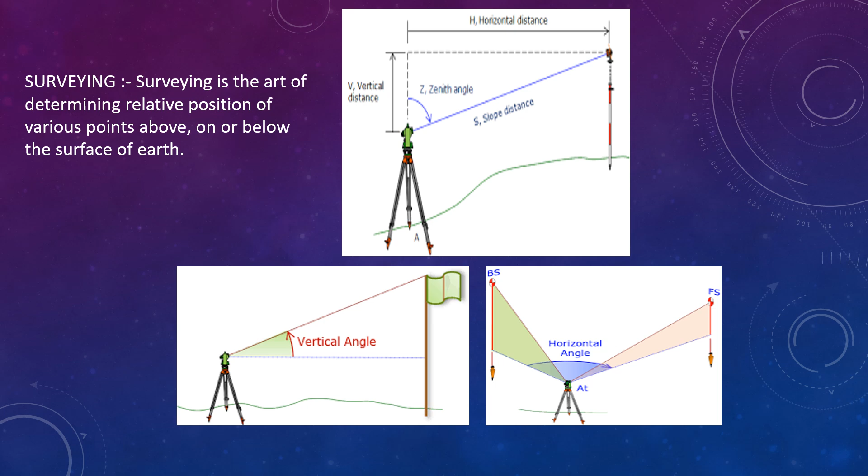Earth has an oblate spheroid shape, meaning an oval shape. Earth has two axes: the equatorial axis and the polar axis. The equatorial axis is the horizontal axis and the polar axis is the vertical axis.

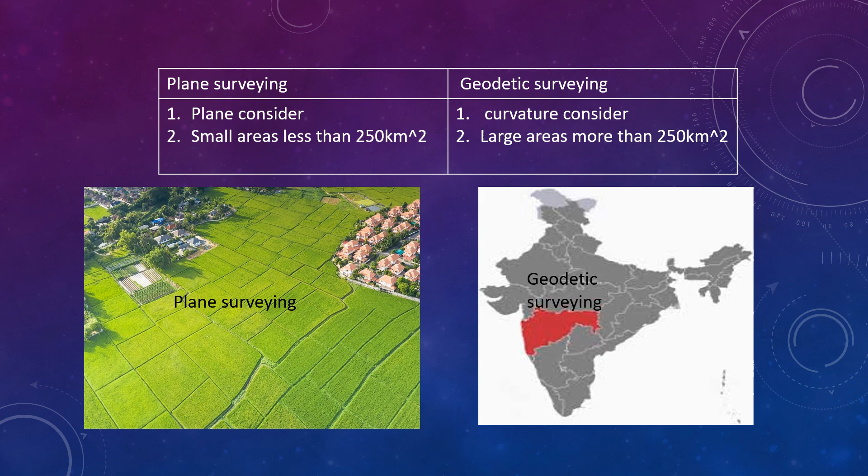Of surveying and the functional classification. So first...

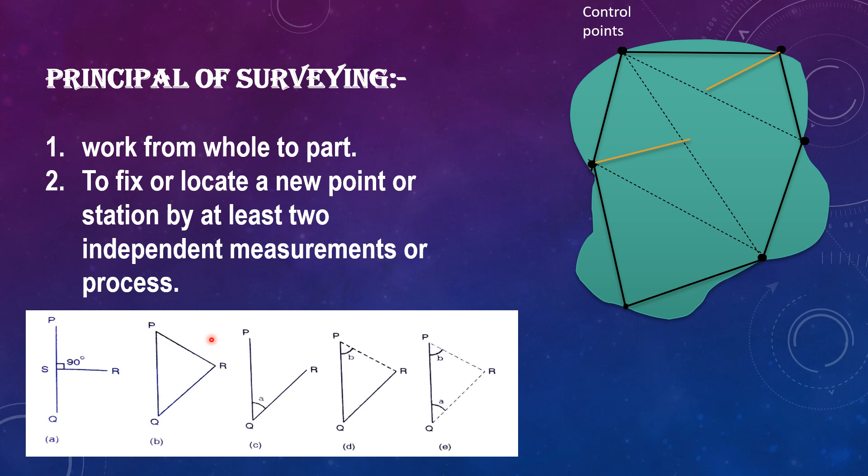Functional classification. The classification of surveying is done on the basis of function. So first is the control survey. In control surveying, we are establishing horizontal and vertical positions on widely spaced control points, मतलब जो widely spaced control points है उसकी मदद से हम horizontal और vertical positions find out कर सकते हैं under the control surveying।

Then second is land surveying. Land surveying is also called as cadastral surveying. This type of surveying is used to determine the boundaries and the area of land. Then third is city survey. City survey is used to carry out the layout of streets, pipes and buildings.

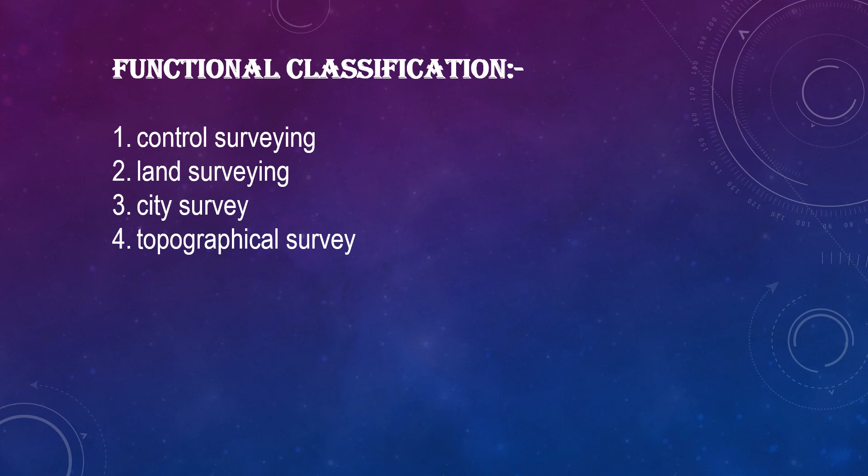Then fourth is the topographical surveying. This topographical surveying is basically carried out to find out the natural features of earth. Then next is hydrographic surveying. This hydrographic surveying is used to establish water flow in case of rivers, and also used to find out the areas which is below the water surface.

Then next is engineering survey. This survey is carried out to plan and design the engineering works. Engineering works means buildings, streets, bridges, dams, reservoirs. For all these type of structures, for planning and designing of these type of structures, engineering survey is carried out. Then next is astronomic survey.

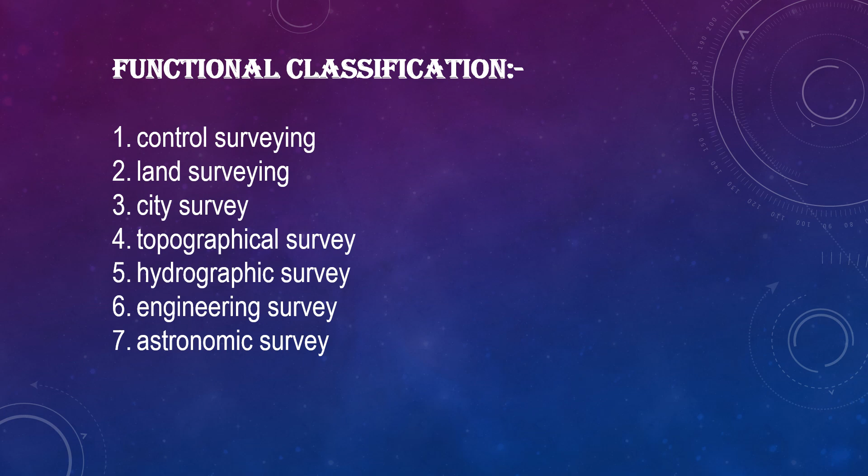स्केल ऑफ मैप इज अ रेशियो ऑफ मैप डिस्टेंस टू ग्राउंड डिस्टेंस। अब ये जो स्केल ऑफ मैप है वो हम हर किसी प्लान को या फिर हर किसी मैप को ड्रॉ करने के लिए यूज करते हैं। ठीक है, मतलब जो कोई भी ग्राउंड का डिस्टेंस है उस ग्राउंड के डिस्टेंस को हम एज इट इज मैप पे नहीं कर सकते या फिर मैप पे प्लॉट नहीं कर सकते। उसके लिए हमें उसकी रिड्यूस्ड स्केल करनी पड़ेगी, मतलब उस स्केल से हम कम स्केल मैप पे ड्रॉ करेंगे। ठीक है, तो वो हम 3 तरीके से स्केल ऑफ मैप बना सकते हैं।

तो उसमें से पहला है लार्ज स्केल। लार्ज स्केल इज 1 सेंटीमीटर इज लेस देन और इक्वल टू 10 मीटर। यहाँ पे एग्जाम्पल के लिए हमने 10 मीटर 100 मीटर लिया है, ठीक है, डिस्टेंस चेंज भी हो सकते हैं।

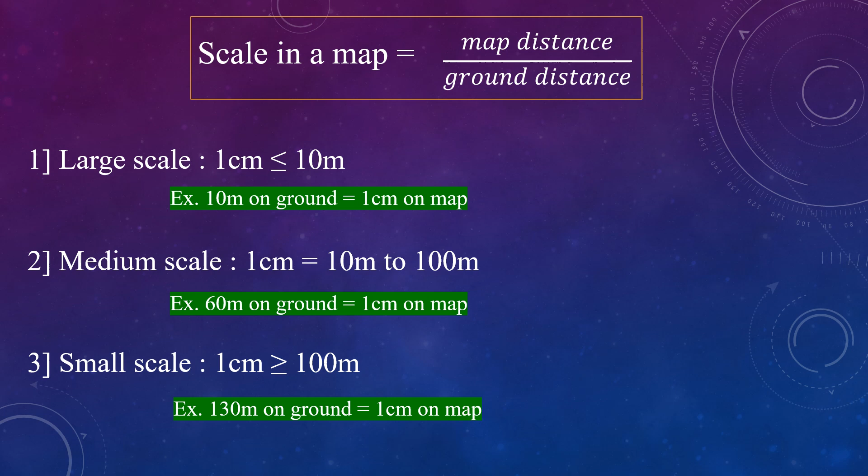Next is a representation of a scale. So there are 3 ways to represent a scale. First is an engineer scale. Engineer scale is represented like this: 1 centimeter is equals to 50 meter. Second is representative fraction. In case of representative fraction, we just need to change the engineer scale into fraction or into proportion like this. So the 1 centimeter is equals to 50 meter in engineer scale is represented as 1 by 5000 or 1 as to 5000 in representative fraction.

So you need to be careful in representative fraction that the numerator unit is same as the denominator unit or vice versa. And the last one is graphical scale. In case of graphical scale, the construction of a map by drawing a line or marking the ground distance directly on it, means the distance on a ground is drawn or plotted exactly on a map, is the graphical scale. So usually we use the engineer scale and representative fraction rather than graphical scale for the representation of scales.

Then this is a question based on a scale of map and representation of scale. Question is, which of the following scale is largest one? So there are four options, and for checking all the four options, we need to convert all the four options in engineer scale. So first option is 1 centimeter is equals to 50 meter. So this option is in engineer scale. Then second option is in representative fraction. So 1 as to 42,000. So in a representative fraction, the numerator and denominator are in same unit. So here if we consider the 1 as in centimeter, then convert the 42,000 centimeter into meter.

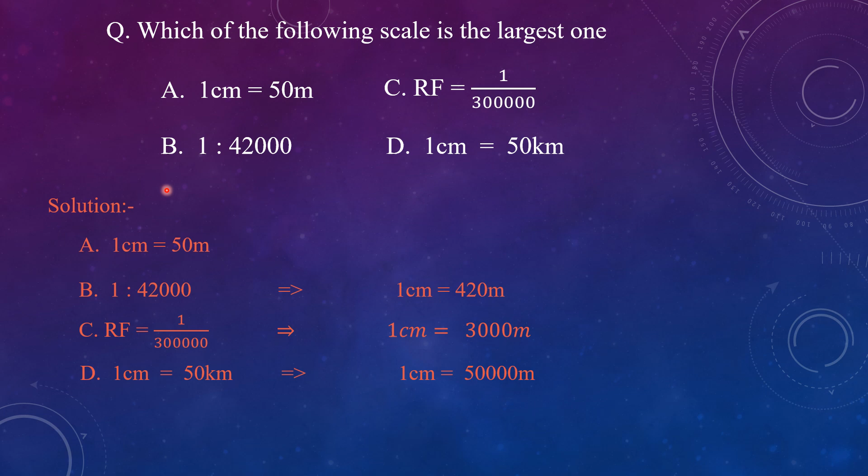Then, types of measuring scale. There are three types of measuring scale. First is the plain scale. The plain scale is able to determine distances in meters and decimeters. Second is the diagonal scale. The diagonal scale is used to determine distances in meters, decimeters and centimeters. And the last one is the chord scale. The chord scale is used to measure or set out angles without a protractor, and the chord scale is rectangular in shape, with graduations from 0 to 90 degrees.

Next is the use of the vernier scale. Mainly there are two types of scale, the main scale and the vernier scale. The main scale is used to determine distances, and the vernier scale is used to determine the smallest divisions of those distances. The value of that smallest division is found by the least count. The formula for the least count of the main scale is the ratio of the smallest reading on the main scale to the number of divisions on the main scale.

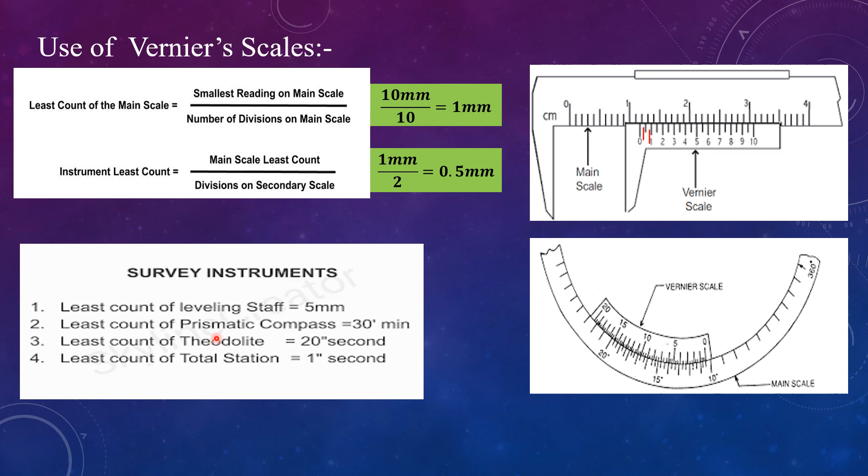I think you all know how to find the values or how to measure the distances with the help of a vernier scale.

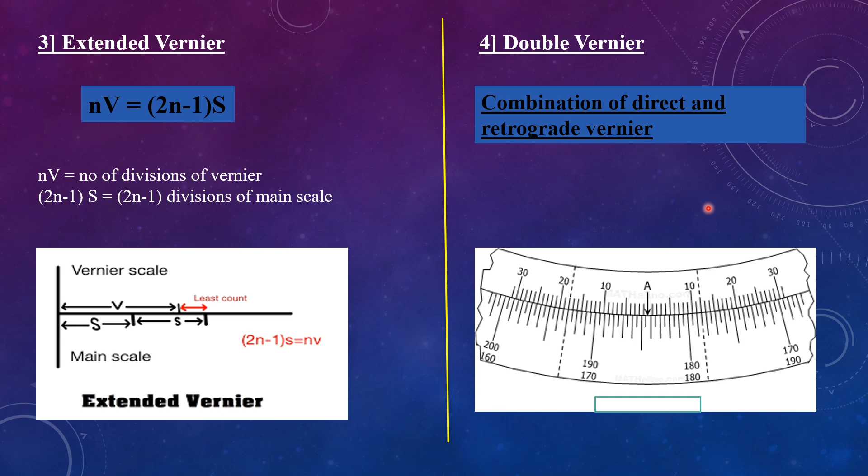Then the last point of this first unit, which is error due to shrinkage of map.

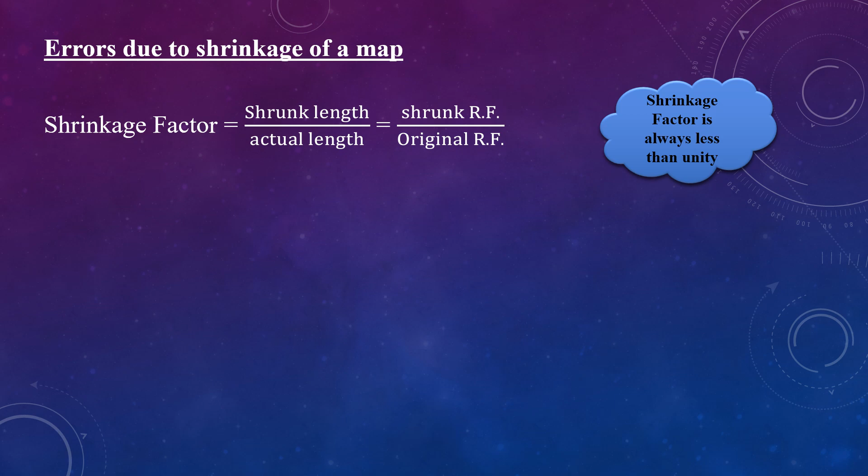After finding this shrinkage factor, you must know that the shrinkage factor is always less than unity, okay. And with the help of this shrinkage factor you can find out the correct distance and correct area. So these are the two formulas to find out the correct distance and correct area for the shrinkage of map.

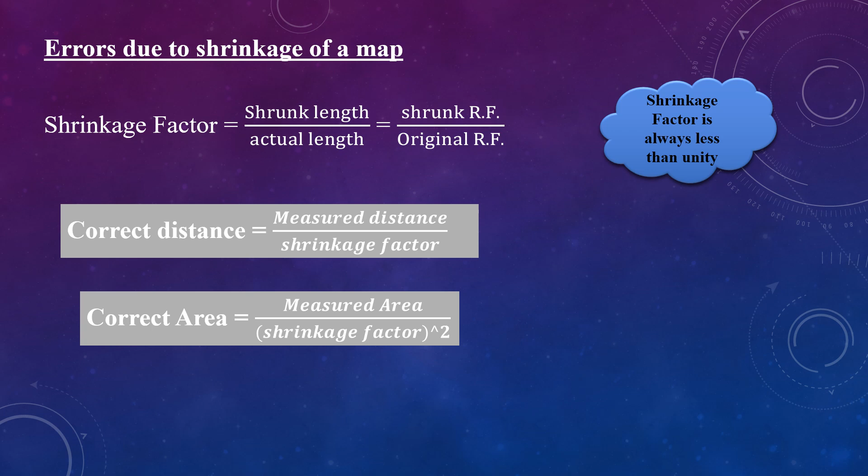And if the distance is measured in an inclined form, at an angle other than 90 degree, then this is nothing but an oblique offset, okay. If length of that offset is more than 15 meter, then that offset is long offset. And if length of that offset is less than 15 meter, then that is short offset, okay. This is about the offset.

One important point here is how we differentiate well conditioned triangles and ill conditioned triangles. If angle of the triangle is greater than 30 degree and less than 120 degree, then that triangle is well conditioned. If angle is less than 30 degree or greater than 120 degree, this condition is nothing but an ill condition. So well conditioned means theta is greater than 30 degree and less than 120 degree, okay.

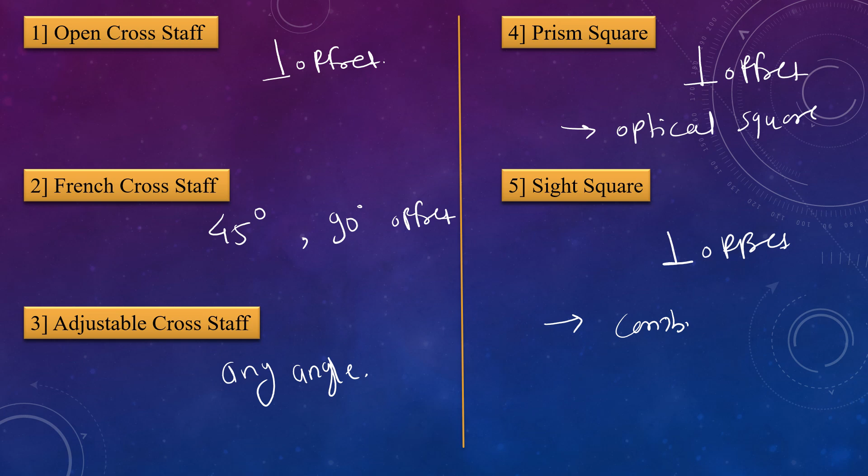Then prism square. This is used to draw the perpendicular offset. And next, sight square is also used to draw the perpendicular offset. This prism square is similar to optical square, and the sight square is a combination of two telescopes. Okay, here the open cross staff, prism square and site square, all three are used to measure or draw the perpendicular offsets. French cross staff is used for 45 and 90-degree offset, and adjustable cross staff is used for any angle.

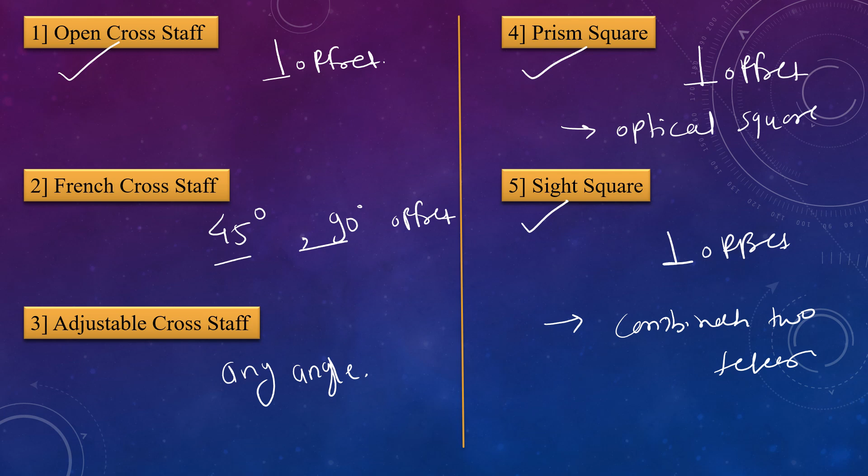Okay, then next is true meridian. True meridian is a fixed line of reference to determine the direction of survey line. True meridian is the line in which the plane passes through the north and south pole. And this true meridian is always constant.

Okay. Then next, magnetic meridian. The direction of magnetic meridian is determined by a freely floating and balanced magnetic needle. Here this magnetic meridian plane passes through magnetic north and magnetic south. But this magnetic north and magnetic south pole is not constant. Therefore, this magnetic meridian is not constant.

Okay, the next is arbitrary meridian. Arbitrary meridian is any convenient direction towards the permanent mark.

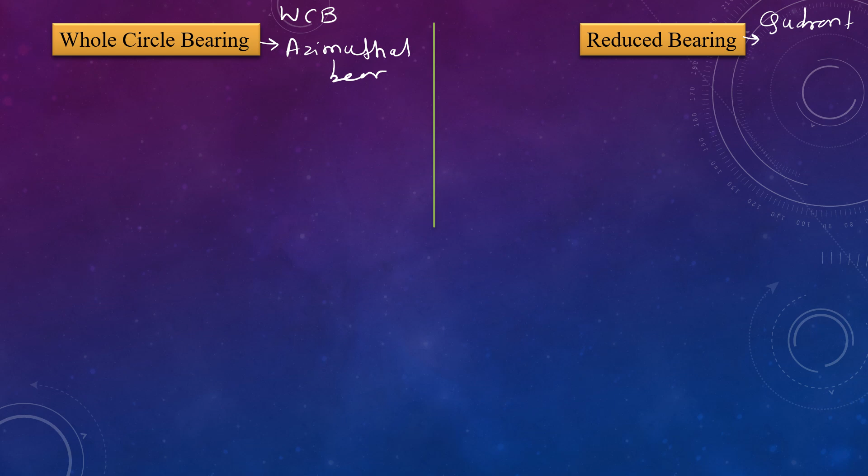Whole circle bearing is measured from the north pole in clockwise direction. Reduced bearing is measured from the north pole and from the south pole, in clockwise and anti-clockwise direction. The angle range for the whole circle bearing is 0 degree to 360 degree, and for the reduced bearing the angle range is 0 degree to 90 degree. So this is how we calculate the whole circle bearing and reduced bearing.

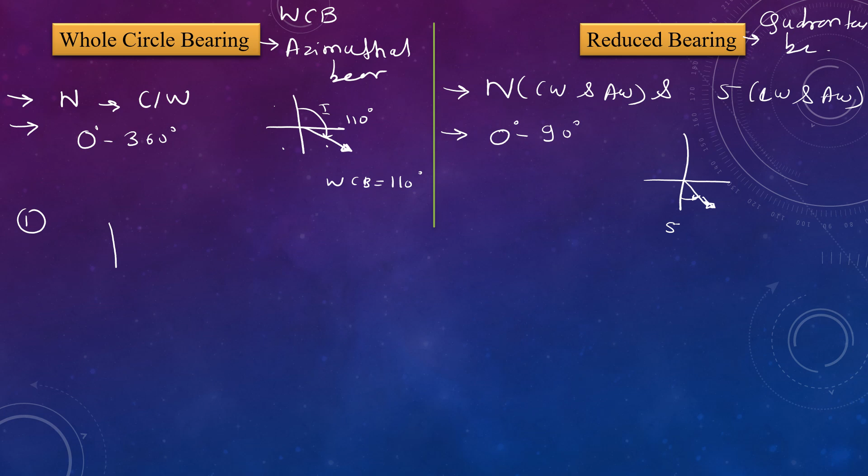So how to calculate the reduced bearing values from the whole circle bearing? We see the formulas one by one. Take the first condition. In the quadrant system we take an angle in the first quadrant. This is the survey line, and the angle is 30 degrees. The WCB value is 30 degrees, and the RB value is the same 30 degrees, because we measure the angle from the north pole in the clockwise direction. So WCB and RB are the same in the first quadrant.

Then second, if the angle is in the second quadrant, take this angle as 110 degrees. So the value of WCB is clearly 110 degrees. But for the RB, the angle is nearer to the south pole. From the south pole the angle is smaller than from the north pole, so that's why we measure the angle from the south pole.

For the south pole, this total angle is 180 degrees, so subtract the WCB from 180 degrees to get the reduced bearing: 180 degrees minus 110 degrees equals 70 degrees. This is the formula for the second quadrant. For the first quadrant, WCB and RB are equal. Then the next condition, if we take the angle in the third quadrant, this is the angle.

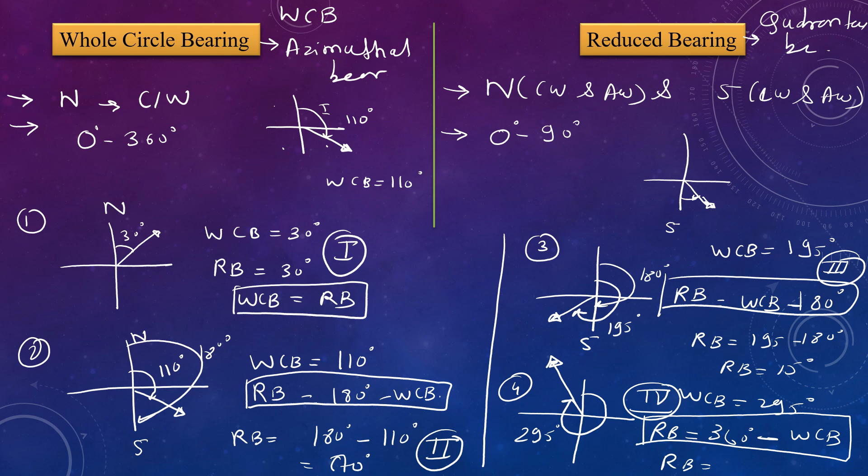So this is all about the whole circle bearing and reduced bearing. The next is fore bearing and back bearing.

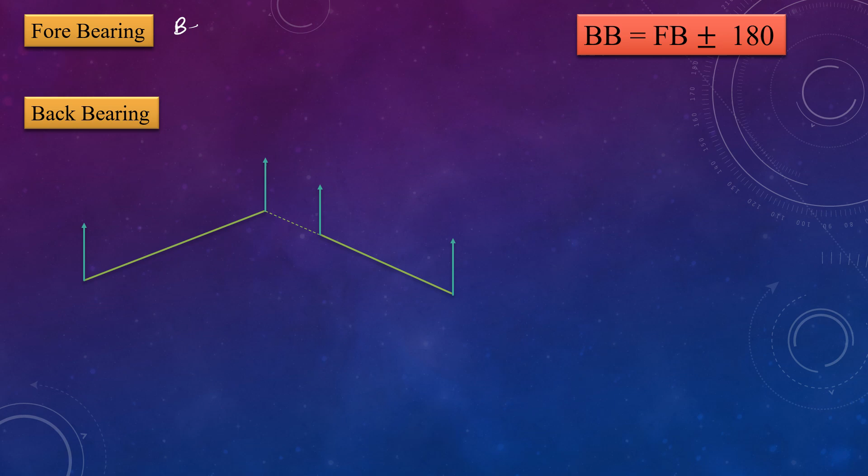Fore bearing is the bearing of a survey line which is measured in the direction of survey work. Back bearing is the bearing of a survey line measured opposite to the direction of survey work. This is what back bearing and fore bearing means.

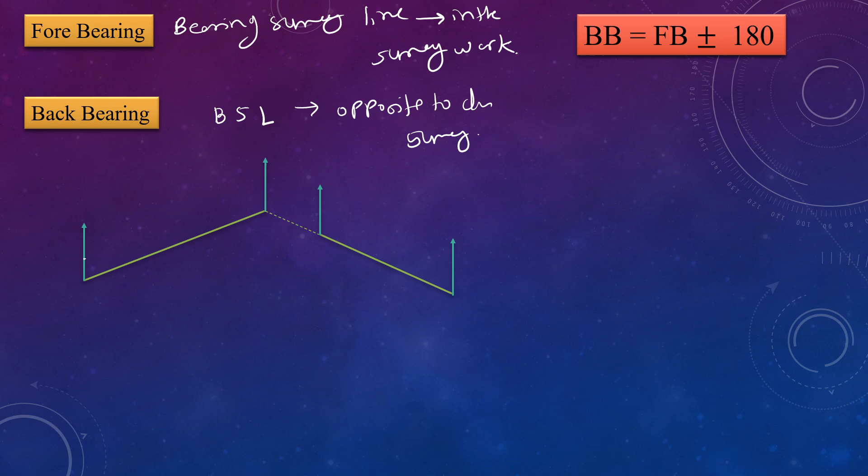Here, this is the one survey line. The fore bearing angle is the bearing measured in the direction of the survey line, so this is theta 1. The bearing measured in the opposite direction is the back bearing, so this is theta 2. For this particular line, theta 1 is the fore bearing, and theta 2 is the back bearing.

So how to calculate this back bearing and fore bearing? Back bearing is equal to fore bearing plus or minus 180 degrees. How do we decide the plus or minus? First, in case of the WCB system, and second, in case of the reduced bearing system. In case of WCB system, if the fore bearing is less than 180 degrees, take it as a positive sign. But if the fore bearing is greater than 180 degrees, then take it as a minus sign. This is how you calculate the back bearing in the WCB system.

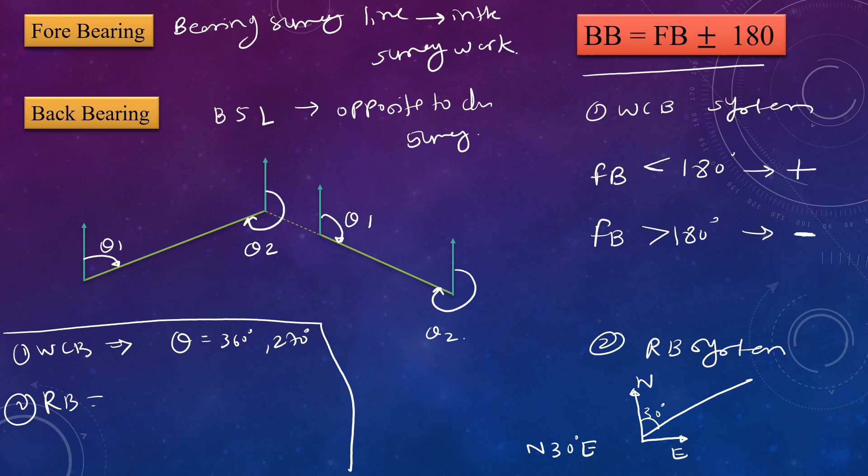But in case of the RB system, if this is the value of the angle in RB, this is north and this is east. If this angle is 30 degrees, it's north 30 degree east. One more point: in the WCB system we directly mention the angle as theta equals 360 degrees, or theta equals 270 degrees. But in case of reduced bearing, we represent the angle as north 30 degree east.

So like this, if this is the quadrant and the angle is 30 degrees, represent this as north, this is east, so north 30 degree east. If the angle is like this in the same quadrant setup, this is south, this is east, so represent it as south 30 degree east. Then, if the angle is in the third quadrant and is 30 degrees, this is south, this is west, so represent it as south 30 degree west. Then take the angle in the fourth quadrant, near the north pole—if this is 30 degrees, represent it as north 30 degree west. This is how we represent angles in reduced bearing.

Here the reduced bearing angle is north 30 degree east. The back bearing in case of the RB system is found just by taking the directions in the opposite sign: this is south, this is west, so if this is 30 degrees, it's south 30 degree west. So this is the fore bearing and this is the back bearing—this is how we calculate fore bearing and back bearing in the RB system.

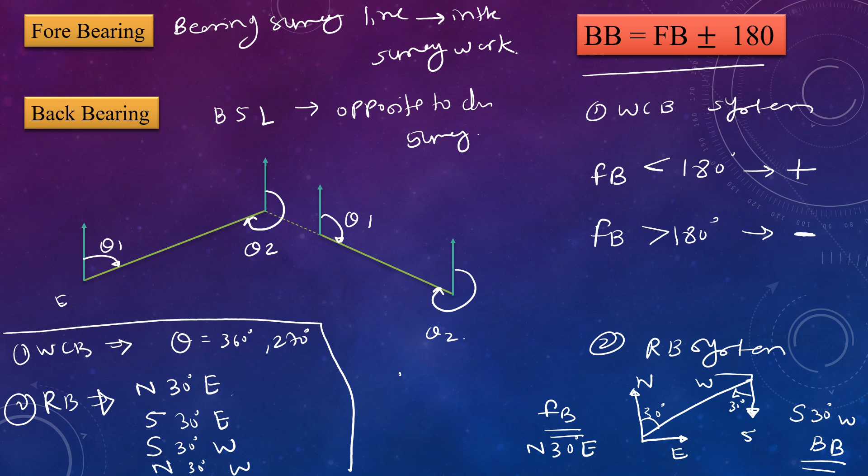The topic is leveling. Leveling is used to find out the elevation of given points with respect to a given or assumed datum. Leveling is nothing but finding the elevation between given points with respect to a given or assumed datum.

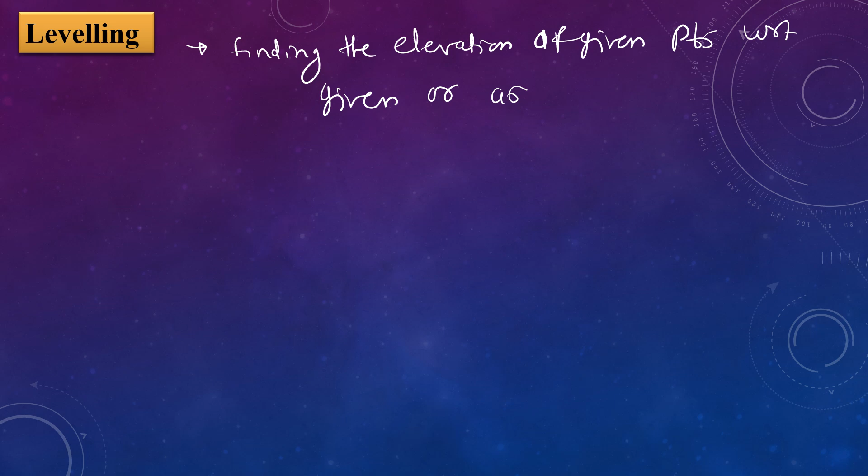In case of leveling, two surveys are done. The first one is plane survey, the second is geodetic survey. Plane survey is considered when the area is less than 250 kilometers square, and geodetic survey is considered when the area is more than 250 kilometers square.

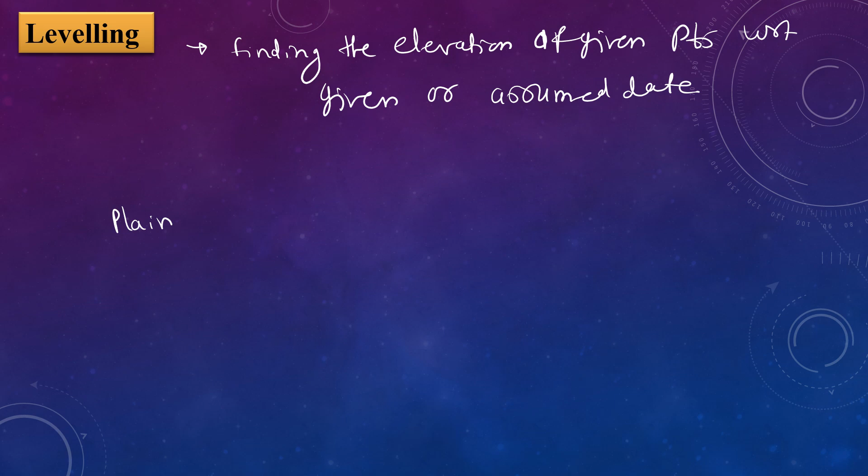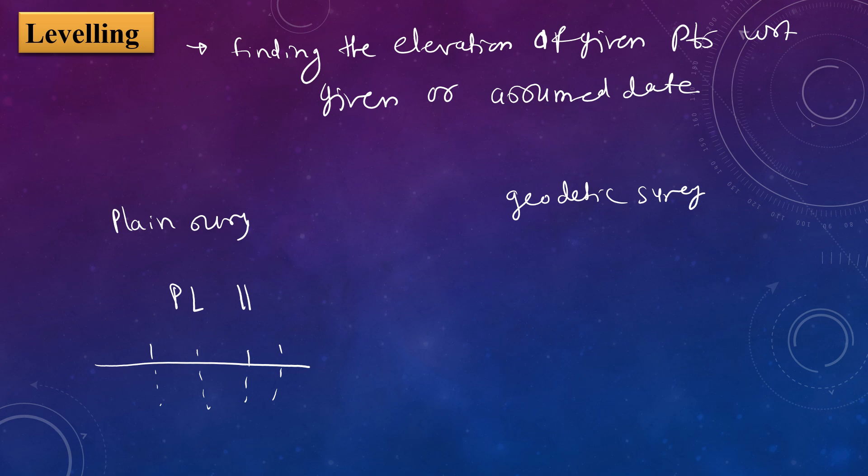In case of plane survey, the plumb lines are parallel. This is the surface and these are the plumb lines on this surface. In case of geodetic survey, plumb lines intersect at the center of Earth. So these are the plumb lines in case of geodetic survey. This is the geodetic survey.

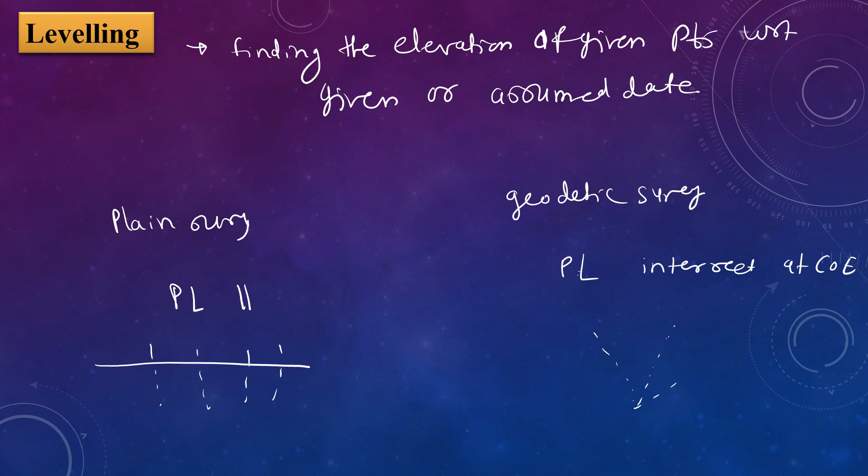Datum is nothing but any surface used to find out the elevation. That's nothing but a datum. Datum is any surface used to find out the elevation.

Next, elevation is the vertical distance which is above or below the datum - this is nothing but elevation. Then the last term is benchmark. Benchmark is a permanent or fixed reference point, nothing but a benchmark to start the survey.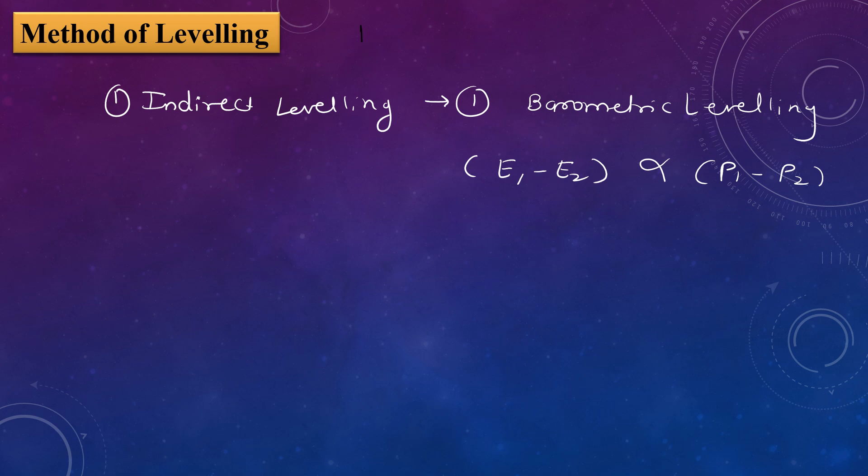Barometric leveling: the difference in elevation, represented here in a formula for easiness. Difference in elevation between two points - here I consider first elevation as E1, second elevation as E2 - is proportional to the difference in atmospheric pressure, which is P1 for the first and P2 for the second elevation. This is barometric leveling.

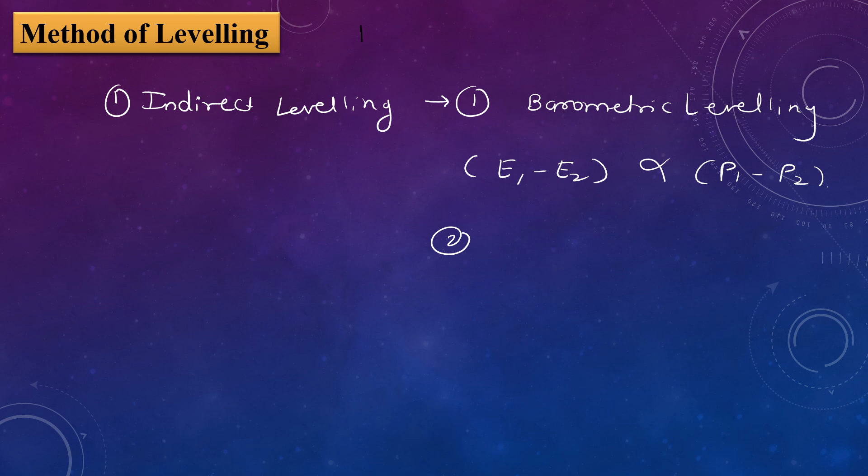Then the second one is hypsometric leveling. Hypsometric leveling is nothing but the difference in boiling point, which is T1 for first and T2 for second. Difference in the boiling point is proportional to the difference in elevation. This is nothing but hypsometric leveling.

Then the third one, trigonometric leveling. Trigonometric leveling is nothing but - in case of trigonometric leveling, the elevation of points are determined, here consider E1 as elevation - elevation of a point is determined with the help of vertical angles and horizontal distance. Here we take the vertical angle and horizontal distance ratio to calculate the elevation of points. This is trigonometric leveling in its simplest form.

Okay, these are the three levelings done under indirect leveling. Next is direct leveling. Under direct leveling, there are four levelings.

The first one is differential leveling. Differential leveling is the difference in the elevation of two points.

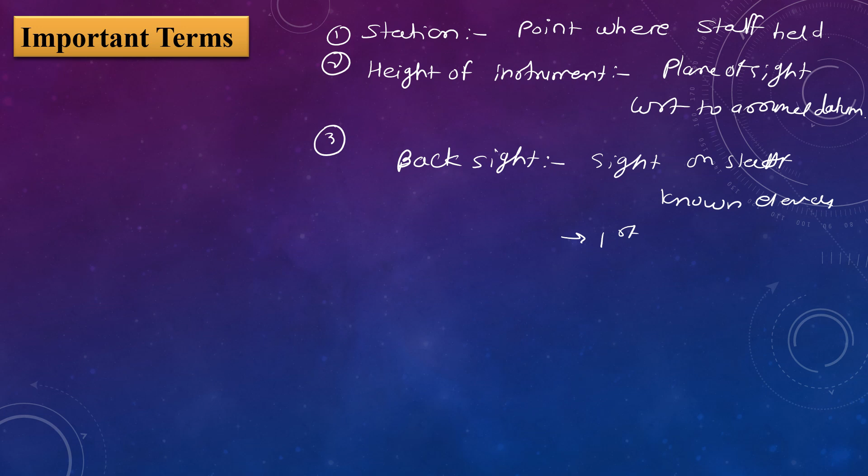Third one is back sight. Back sight is taken on a staff held at a point of known elevation. Back sight is a sight which is taken on the staff held at known elevation, and this back sight is the first reading. Back sight is also known as plus sight. The height of instrument is calculated with the help of back sight - height of instrument is nothing but benchmark plus back sight.

Next, fourth is foresight. Foresight is a sight taken on a staff held at unknown elevation. Here RL, or reduced level, equals height of instrument minus foresight. This is also known as minus sight. This foresight is the last reading. This is about back sight and foresight.

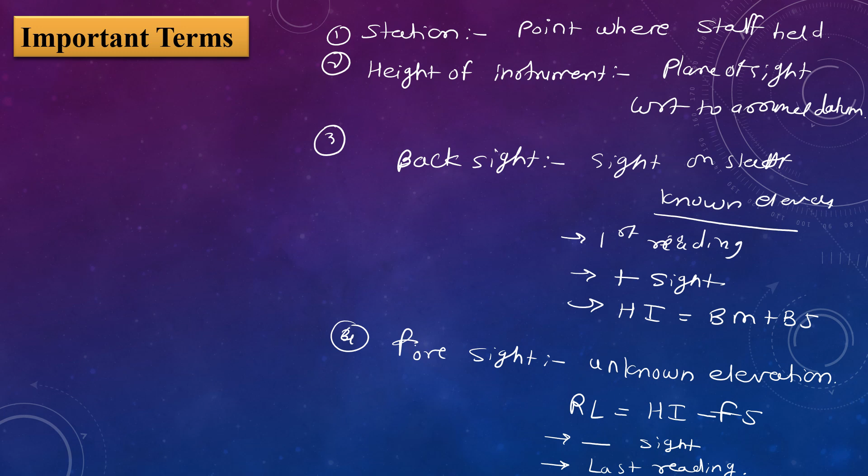The next term, fifth term, is intermediate sight. Intermediate sights are the readings which are in between the back sight and foresight.

Then next one is change point. Change point is that point after which the instrument changes its place. Here, back sight and foresight are taken on the same point - the back sight is taken on that point which was the foresight for the previous point. So this is nothing but a change point, where we change the location of the instrument.

The next are the types of levels.

In that, first one is tilting level. In case of tilting level, the line of collimation of telescope is parallel to axis of bubble tube. Line of collimation of telescope is parallel to axis of bubble tube. So this is about the tilting level.

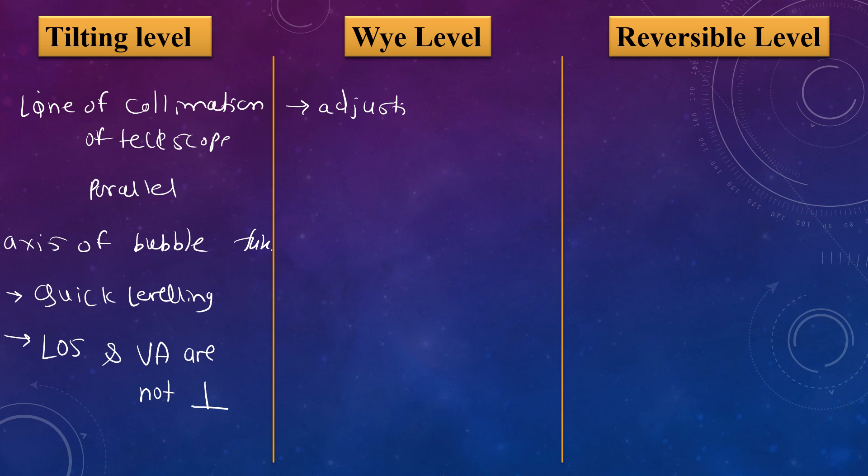Then next is Wye level. In case of Wye level, the adjustments can be done rapidly. Here the adjustment in case of this level is done rapidly, but the adjustments are for shorter span. Okay, the adjustment span is very short.

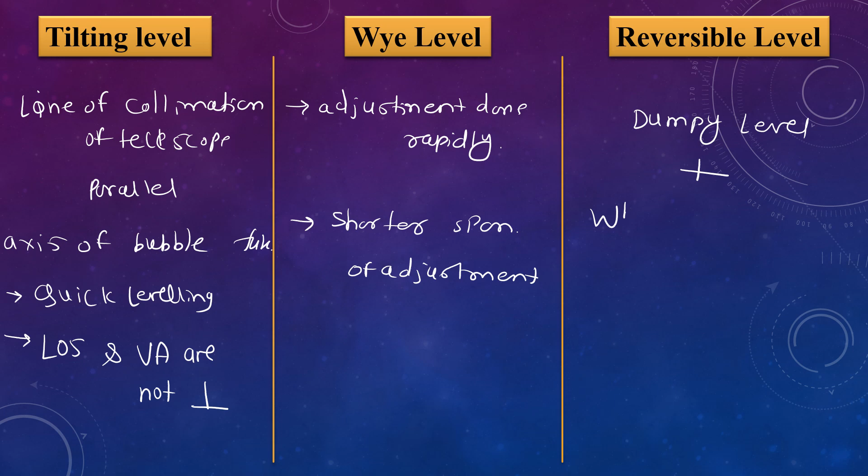Then next is reversible level. So reversible level is the combination of dumpy level and Wye level. Combination of dumpy level and Wye level is nothing but a reversible level.

Then next is dumpy level. So here dumpy level has four components. First one is telescope. So telescope is used to draw the line of sight. Then next is level tube. This is used to check the line of sight is horizontal or not.

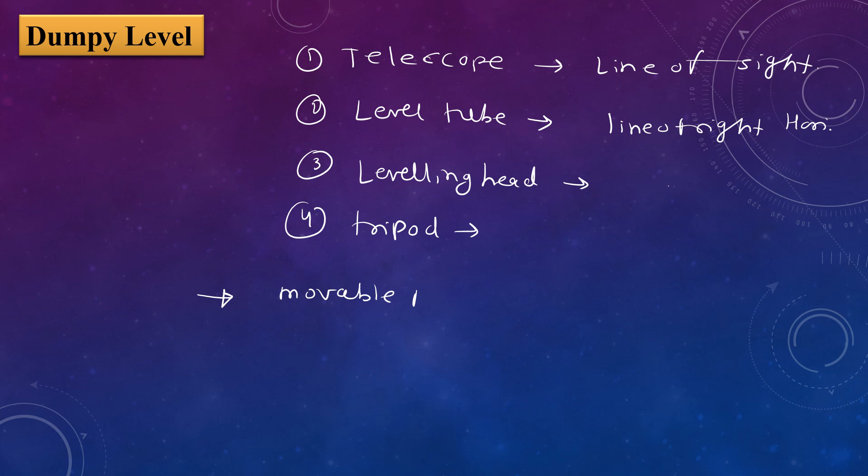Okay, then advantages of this dumpy level are, here this dumpy level is with no movable parts. Then next, the adjustments are fewer, and these adjustments last long. So longer life of adjustment.

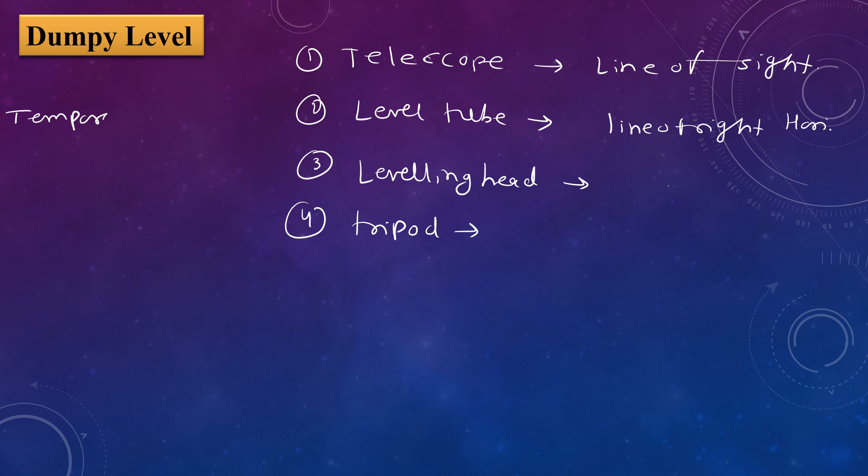Okay, then next are the adjustments, which are temporary adjustments and permanent adjustments. In that, first we see the temporary adjustments. So temporary adjustments in case of dumpy level are, first one is setting up the level. Second is leveling up. Third is elimination of parallax. Then fourth is focusing: focusing the eyepiece for crosshairs and focusing the objective end for the image of that object. Okay, so these are the temporary adjustments.

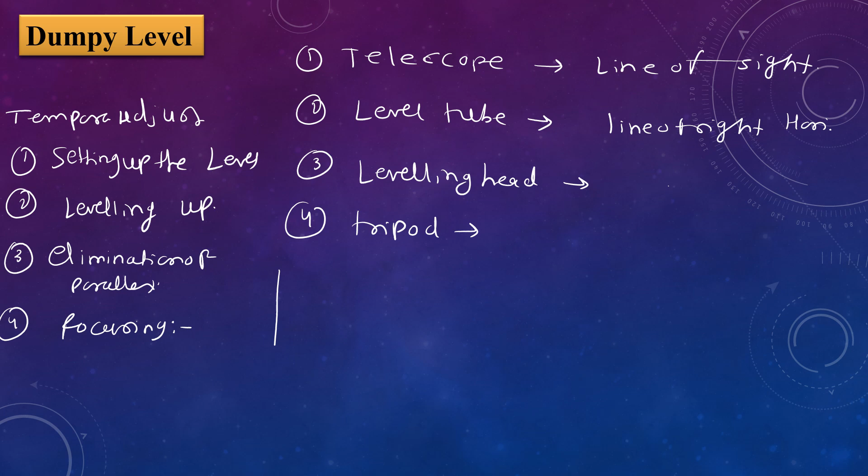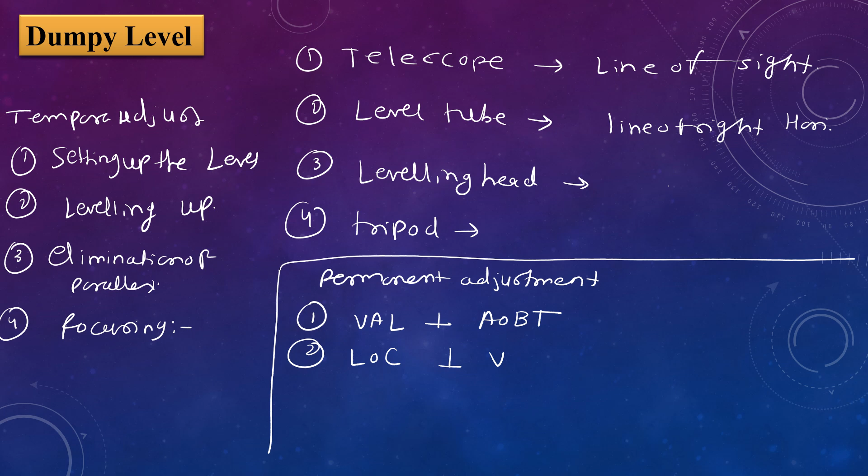Then permanent adjustments for this dumpy level. So in the permanent adjustment, first one is vertical axis of level is perpendicular to axis of bubble tube. Then next is line of collimation is perpendicular to vertical axis. Then axis of bubble tube is parallel to line of collimation.

Next is axis of telescope coincides with the line of collimation. Then last is horizontal crosshair is perpendicular to vertical axis. So these are the permanent adjustments for the dumpy level.

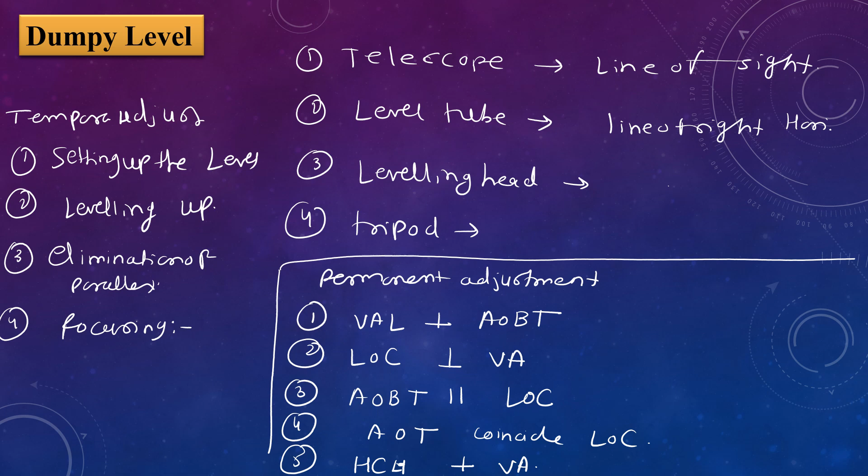The next and last point of this video is curvature and refraction error. So in that, first equation is related to curvature correction. Cc is curvature correction. Formula is d square divided by 2R, which is always negative, and this Cc is 0.07849 d square, which is always negative. Here put this d in kilometers, not in meters.

The next formula is about the correction for refraction. Cr is equal to d square divided by 2R into 1 by 7. So Cr is equal to 0.01121 d square. This d is put in kilometers.

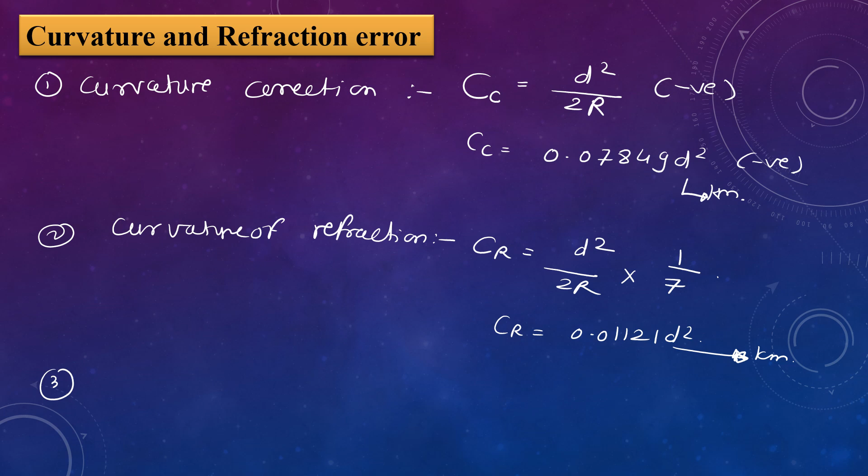Then third is combined correction. So combined correction is Cc plus Cr. Here Cr is always positive. Cc value is minus d square divided by 2R, and Cr value is d square divided by 2R into 1 by 7. So this value is minus 6 by 7 d square divided by 2R, and simplified value for this C is equal to 0.06728 d square.

Okay, so this is all about the leveling, and leveling is a very important topic from surveying. So these 20 minutes cover your leveling part completely.